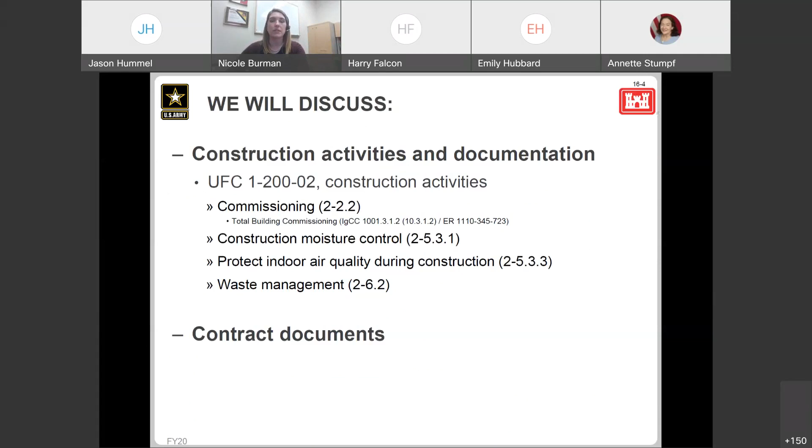We want to talk about specific strategies being implemented to achieve those goals, discuss what those expectations are, and those unique construction methods that maybe we should be talking about if somebody has something to bring to the table. We want to be a team and pull that information together in this meeting, identifying strategies and methods, bringing up lessons learned, identifying risks that the contractor sees when reviewing the documents. We want to bring all of that up right at the beginning.

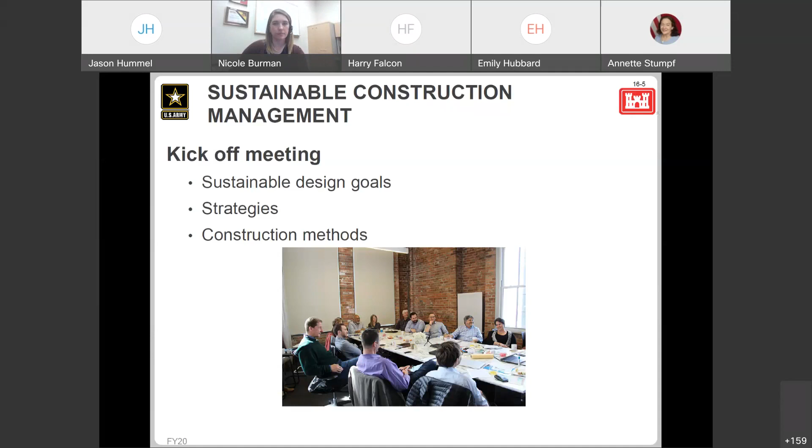One of those pre-construction submittals includes the sustainability action plan. This is, in my opinion, a very critical submittal. We want to make sure it is truly in that early stage of construction, because what this signifies to us is a solid understanding that our contractor is tracking and understanding the expectations for the high-performance sustainable building piece that our UFC addresses, in addition to, if that project requires third-party certification, we want to make sure they understand the similarities, the differences, and how they achieve those requirements written in the contract from start to finish.

So in this plan, we're looking—it used to be called the LEED implementation plan, so now it's called the sustainability action plan. Either way, it's showing us there's an action here. It's an early phase, wanting to make sure we're talking about that and working through the pieces that are going to be put into place to ensure everything in the contract gets accomplished. Eventually this plan itself falls into part of that sustainability notebook.

Sometimes that's a little confusing. Really, there's a lot of plans that fall into the sustainability e-notebook, and that notebook really is the final record of what was talked about, what was concluded, how things evolved, why things changed if they did, and then what was the achievement—did we get third-party certification and so forth?

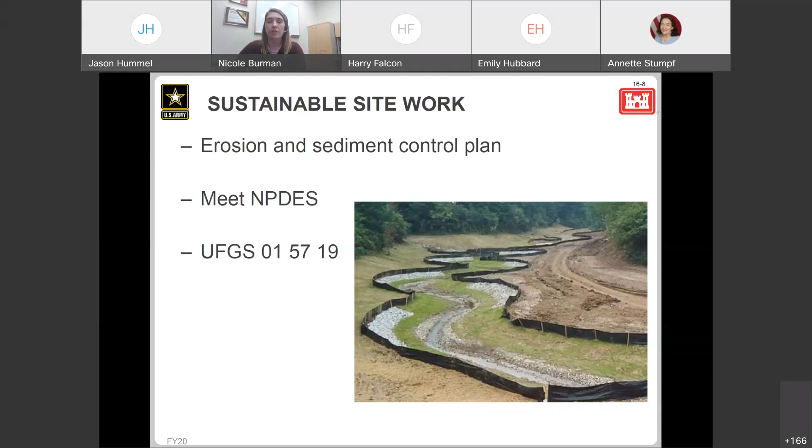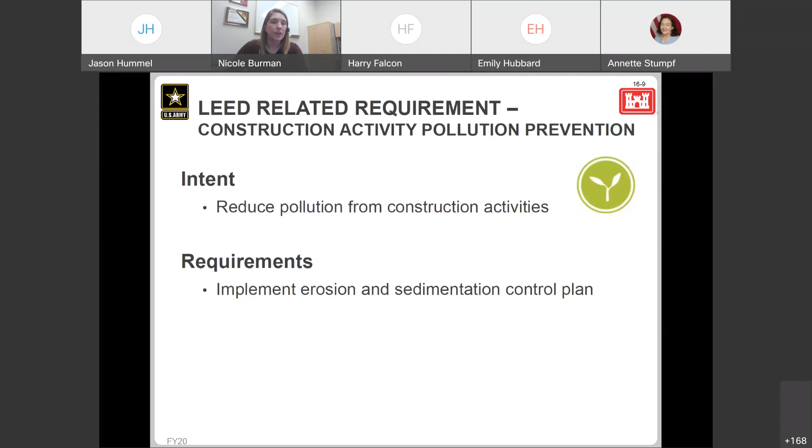Okay, so now we're going to dive into that commissioning element. This has several slides that talk about this. It will still be a high-level conversation, really, trying to make sure we hit all the points.

But if you need more detail, I would urge you all to review ER 1110-345-723. That really dives into commissioning, and if you need more information or would like to talk to people, we, part of the webinars, can help guide, but also your local district would have people who would be able to talk through commissioning a little deeper.

But when we're looking at this, this may be falling under construction here with our webinar today, but it's not just for construction, not just a construction activity. We're looking at that quality focus that enhances the delivery of the project. There's a lot of pieces that happen in construction, but the success of commissioning really starts at that early starting point in design.

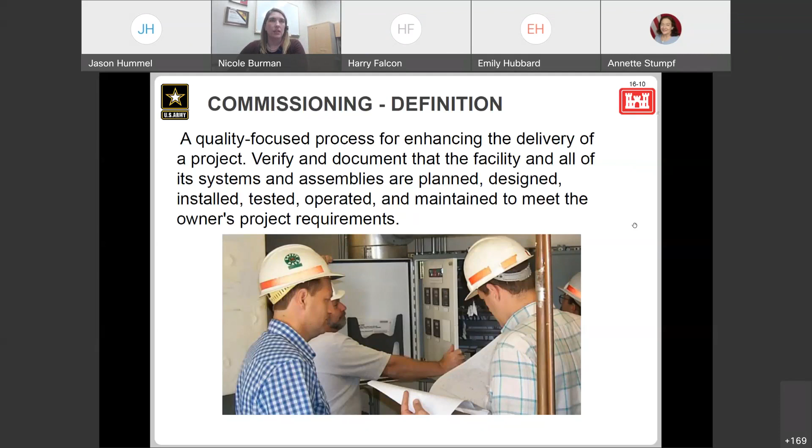So diving into more of those detailed pieces, the UFC in 2-2.2 identifies the commissioning requirements. It focuses on what used to be called ASHRAE 189.1. So now we're looking at the International Green Construction Code. This looks at incorporating commissioning into your projects.

Of course, it needs to be appropriately incorporated to the size and complexity of your building. The ER has some information on that too, but really looking at what is that specific piece that you're trying to build and what systems and components are in that feature, and then making sure that we're putting those commissioning pieces that make sense for that project to that magnitude.

We also want to look at these sections of the IGCC to see more of that in-depth. In the next couple slides, we'll actually see kind of a listing of what they identify in systems for commissioning itself. But all PDT needs to be involved in the commissioning process.

So the next item here, we have our UFGS. That's an 01 spec, so 01 91 00.15 10, Total Building Commissioning. That specification, a commissioning team can put together, the designer of record can put together, but we want to make sure that all of those parties are involved in understanding what we are working towards, to the extent of what kind of testing we're doing.

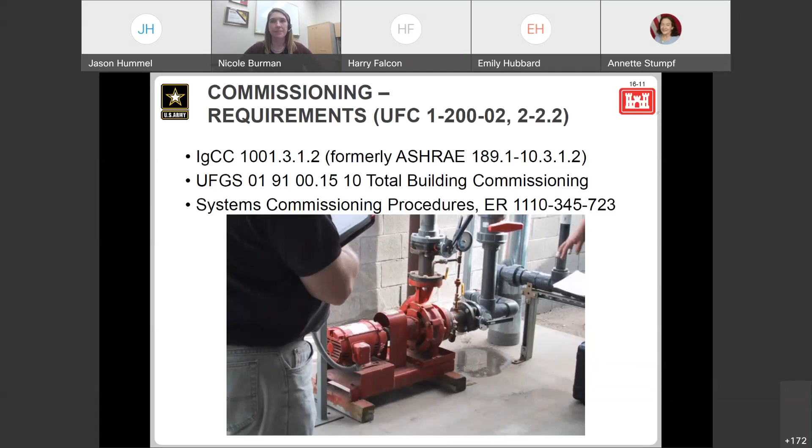Who are those specialists? When we're looking at CXG, that is the government commissioning specialist. So if we aren't doing the commissioning reviews ourselves, as in that main commissioning person who's certified to do commissioning in-house, then we're hiring an AE to do that. The CXG, the government specialist, is that hired AE. So that's who they are under this whole umbrella.

And then we could have commissioning team members—design team members who have that hat of commissioning—and then same with construction. We want to have construction involved very early to talk about all these commissioning pieces and that integration. So that would be that part of the team. And then, of course, we have the owner, the designer of record, the construction contractor who would eventually get on board here, and then operations and maintenance staff.

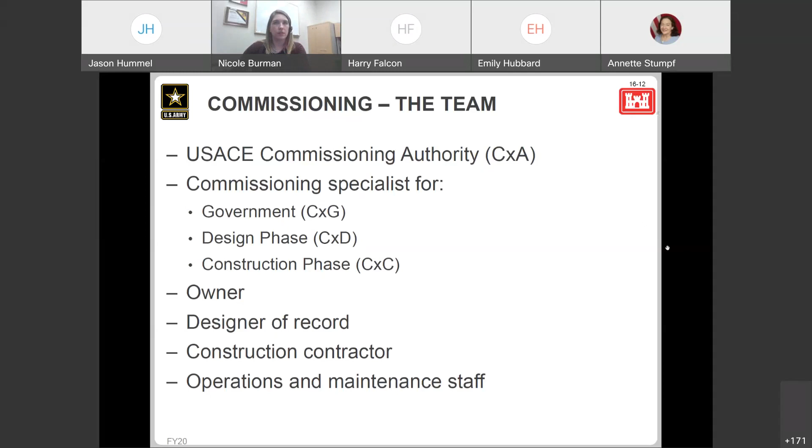But that does not mean the project can't identify additional systems. So this is where that early consideration needs to be had, and the team can sit down and talk through what systems should be incorporated, what you know as the designer of record, what you're putting in the project.

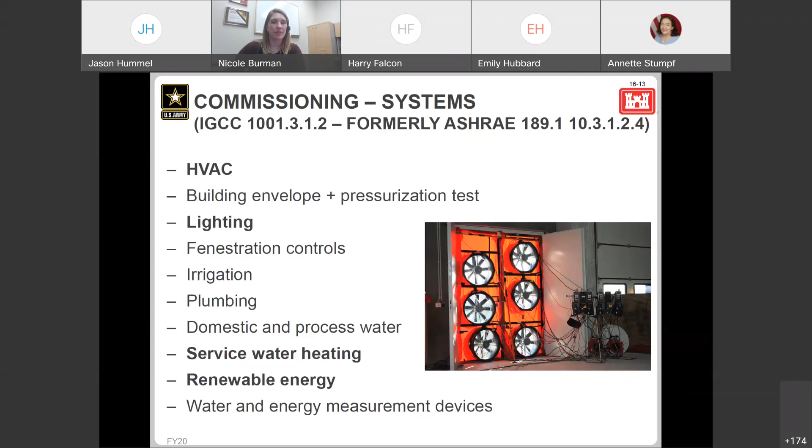Okay, so hopefully we'll have some time at the end too if we need to talk some more about this.

So commissioning activities—we are looking at a lot of items that are incorporated into those activities. These activities are identified in the IGCC. And so when we're looking at the owner's project requirements, a lot of times I get questions about, okay, we have another document we have to make.

So what we found over the years is that most districts or design teams are utilizing their PCRs, their charrette reports, or even the RFP as those owner project requirements, because we really want to mitigate some of that risk by having duplicated requirements, and we also have more efficiency if we apply some of these pieces together. But similar to identifying the government CXG as the commissioning authority for third party, we also want to make sure that's clearly written somewhere. I've actually seen that written in the 0191 spec to clearly state owner's project requirements are the same as the charrette report or the RFP. We want to make sure that's clear.

Then we also have that basis of design—that's the commissioning term for it. Sometimes we use that term ourselves, but we also use design analysis, so those are one and the same. That's really diving into how we took those owner project requirements and put that into the design—how did they evolve, why did certain things happen, what do we need to be cautious of. All of those pieces pull that into the evolution of design and then into construction.

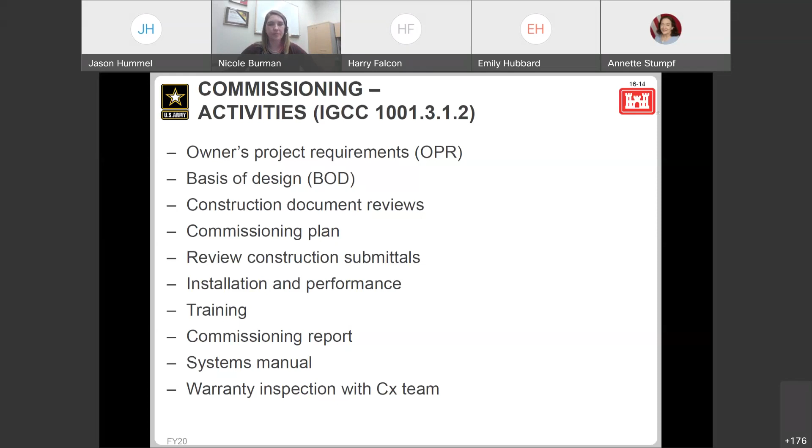Okay, so lessons learned in commissioning. We want to identify and designate those authorities early.

So when we're looking at schedules and projects, for an in-house project, potentially we've got that element where, hey, we don't have a commissioning or a set-aside commissioning team, or we don't have the workload to support a set-aside commissioning team. We're going to need to get somebody. So that's an AE action we're going to need to be thinking about right at the beginning. We want them on board, preferably before 35%, but no later than 50%, right?

We want to make sure that we get that integrated into the project itself, and we want to get those roles and responsibilities figured out. We want to understand what those commissioning reviews are looking like. That's another sticking point that really wants to make sure we work with our construction team to understand what those reviews are, both in design and then what those are physically for the submittals in construction.

And then adequate time, so this is another soapbox item for me, but we've got to make sure that we identify commissioning in our schedules, right? We need to have that and see it from the contractor detailed out in their construction schedules, because it's not just a red zone activity. It used to be that way or used to feel that way, but there's a lot of pieces of review and prep and testing. All of those pieces come at different phases of construction, especially when we're talking about the exterior of the building, looking at air tightness features and so forth. So we want to make sure that's in a schedule and people are tracking it and linked to things.

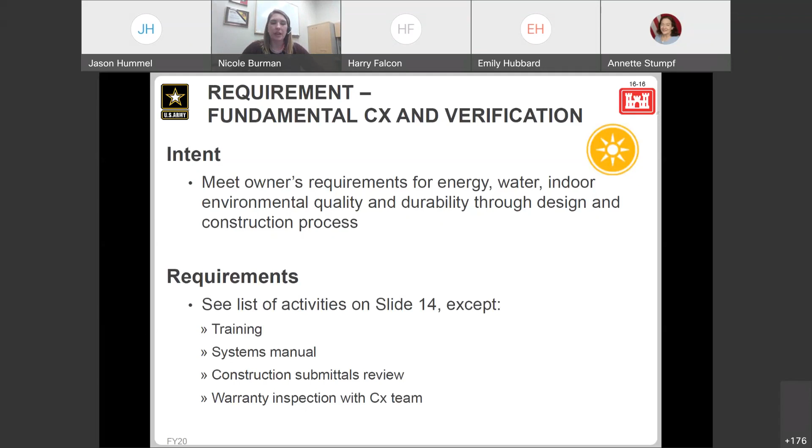Really, our ECBs and requirements already in the UFC should be meeting this requirement. Of course, as we mentioned before, you always need to pay attention to, if we're going after third-party certification, how removed that CxA or CxG, whoever's that LEED commissioning certified individual is, where should they be sitting? Making sure they're most likely not integrated with the design team would be what we'd want to be seeing.

And then the secondary one here, which is an opportunity, which we should be almost meeting naturally if we're following the ER, if not meeting it all the way for enhanced commissioning. So really adding that envelope element, that total building element into here, would meet or get us darn close to getting that enhanced commissioning.

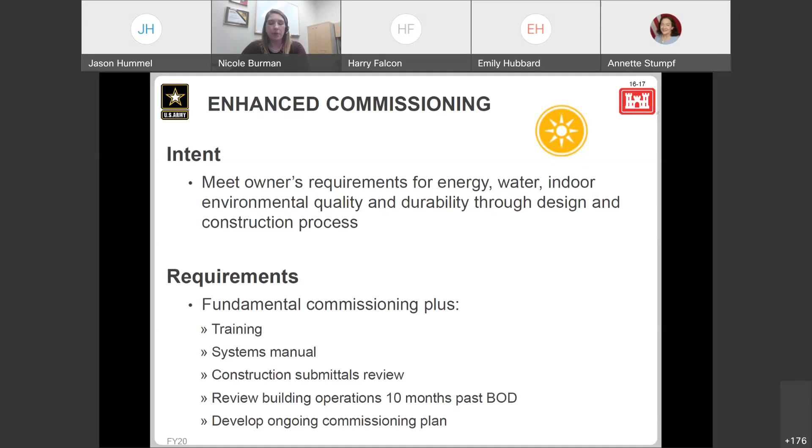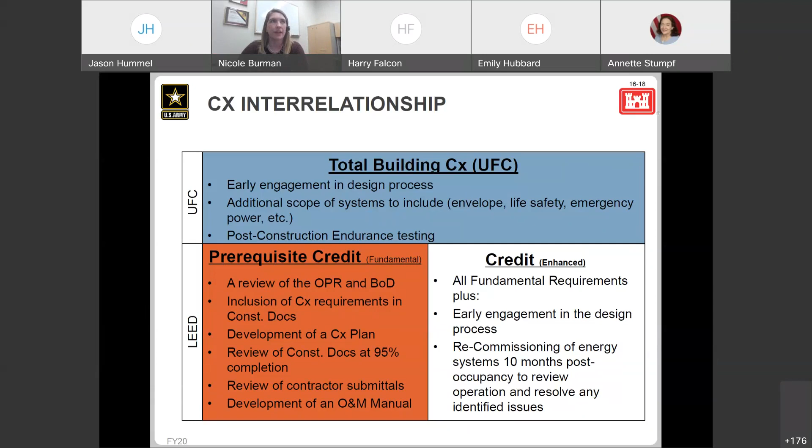So we're trying to control that moisture in the building or where we don't want it to be collecting, ensuring that we have that indoor environmental quality. And again, we're looking at that IGCC piece, calling out protection of materials from damage. So we do not want to install anything that has that biological growth or moisture, right? We're wanting to avoid growing mold in our buildings.

This, of course, seems like a no-brainer, but this is where we want to make sure we're including that in our conversations. It may seem natural to make sure that elements are covered up, buildings are dried in, and features are not getting damaged by moisture. But we also know things happen, but to ensure that those things get resolved or don't happen, we're talking about them in our preparatory meetings.

We're making sure that we're talking about this during our monthly sustainability meetings. We're making sure that materials aren't arriving too early to the site, questioning potentially why we're there, and if they are there, how are you going to confirm that we're going to protect them and keep them away from potential risk here.

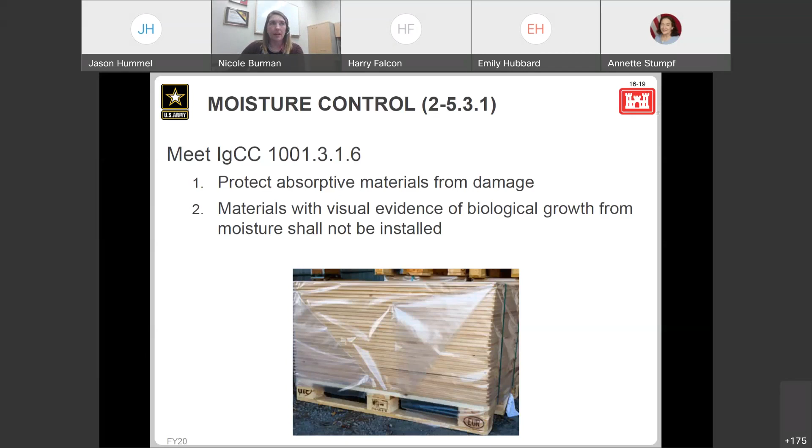Nope, my cursor, there we go. Okay.

So when we're looking at another item, it's protecting the air quality during construction. So here it's mainly focused on really those materials that could absorb or be damaged during construction. For that air quality piece, again, we have approaches and things we have to consider from the International Green Construction Code, and we're looking at that air conveyance material.

And then we are requiring all the correct filters, right? The design requires it. We ensure that those are installed correctly. The controls are in place when we're operating the HVAC system during building flush out, that we've got that figured out. And we're identifying, again, in our construction schedule, when that flush out is going to happen, making sure that's linked to something. So if we know things move because things happen, we know that's affecting that flush out piece, and thinking about what the ramifications really are, and if that's meeting our sustainability goals, or how we can adjust that and work together to find a good solution.

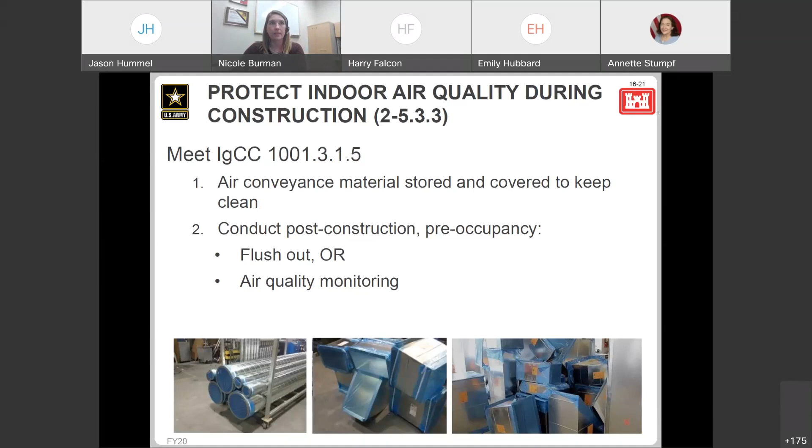So for third party, we have the plan, right? The air quality management plan. This would be incorporated into that e-notebook per our specifications, but this is required as a prerequisite for LEED specifically.

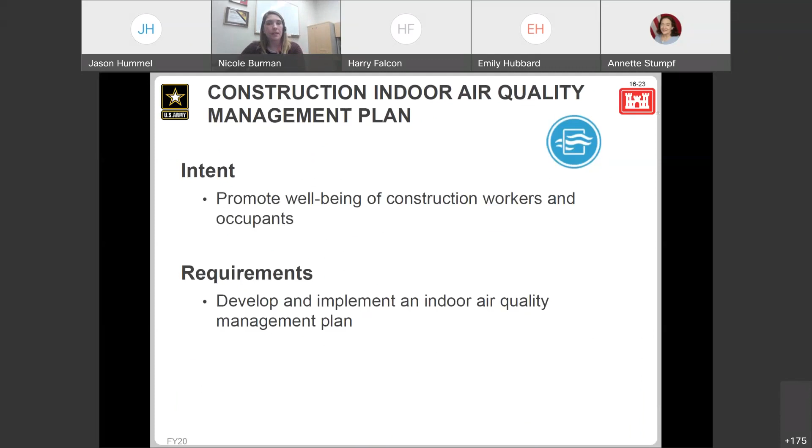And then we've got the assessment, so an opportunity for the team is to see if this is going to be a part of that project and a part of the scope for the contractor. And then, of course, tracking that. If we've identified that the contractors agreed that this is something they'll pursue at the beginning of construction, we want to make sure we track that and understand that's a credit that would be lost if we don't pursue it in the right manner. So it's important to know if we're pursuing that credit or not, but that's how that's integrated with our UFC.

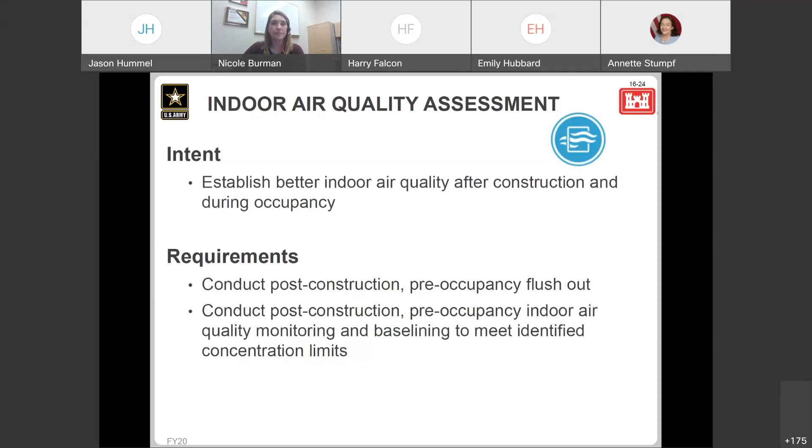Okay, waste and material management. This is probably not new to any of us, but when we're looking at the requirements, I'd note that the IGCC requirement actually requires a minimum of 50% waste diversion, but our UFC and other policies require 60%. That did increase, maybe 10 years ago I feel like it's been a while, but either way our standard spec has that written in there. It should be covered and taken care of for us, but we want to be aware that the 60% is required.

I will also note that we're looking at non-hazardous construction and demolition waste. This has come up before where we're like, hey, we got a lot of abatement, there's no way we can meet this, but that's not included. We're looking at that non-hazard waste.

This is also where we want to track all those calculations. Anything leaving that site, we need to be accounting for that. We need to see those haul records. Those need to be shown in a timely fashion in that e-notebook, which is supposed to be reviewed and looked at every month during the construction phase. And so all of these pieces would be integrated, being aware of what's moving on site, what's working through that, and then where that information is implemented into our record documents.

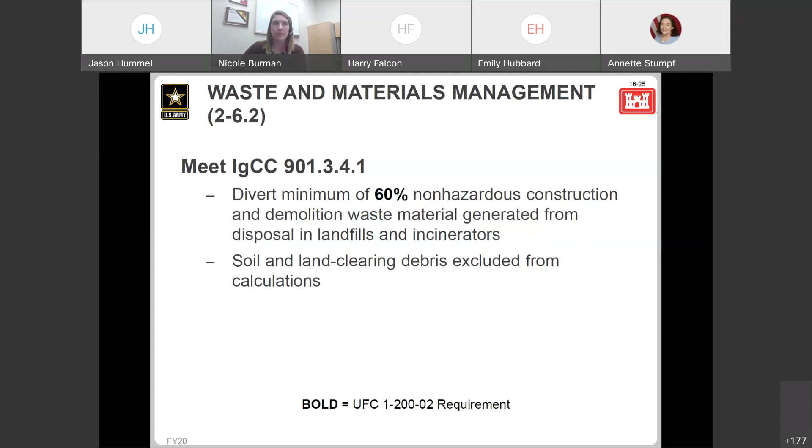So diverting, I probably covered most of the same stuff here, really looking for evidence of meeting that, talking about that sustainability goal, demonstrating compliance with the haul records, but also talking about those in your preparatories and the toolbox, making sure all subs and people involved are aware of this, and tracking that somebody else is also monitoring this. Somebody is keeping track of this, and that this has some importance to the project.

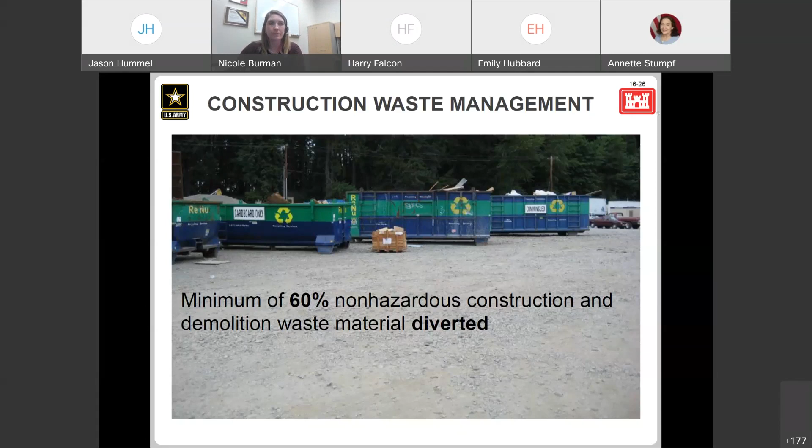All right, so we also identify in the 013329 spec the contractor's sustainability professional. This could be that LEED AP BD+C if we're doing version 4, right? They actually require that to be within the same LEED system that you're applying for certification. But if the project is obtaining a different third party verification of some sort, if you're Air Force and so forth, that could be the LEED AP or some other type of credential that you want to put in that specification.

So that's not accounted for specifically in a spec. If you're working with other agencies, you want to make sure you're identifying if that's appropriate to open that requirement up a little bit. But we still want that sustainability professional there. Those individuals, even if you're doing a guiding principle validation, if they have a LEED AP, they're going to have those principles and that awareness we need, that professionalism, incorporated into the process. I have seen projects that maybe don't have that person on board, and it's tough to work through that process, and there's a large learning curve, and maybe things aren't getting tracked because we don't have that professional on board. So it's important to ensure we're confirming they've got somebody who meets whatever standards we've written into that specification.

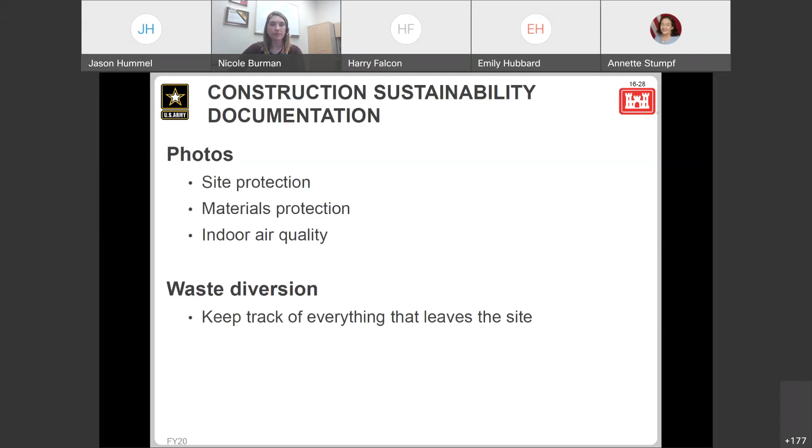Okay, so the big moment comes. We've got construction winding down. Things are potentially or soon to be closed out. We've got this third-party certification happening. A lot of things are in mind. Hopefully at this stage, when we're in the red zone, this isn't the first time we're talking about sustainability or any awareness of that third-party certification needing to be submitted.

We want to be reviewing with some more diligence that sustainability e-notebook in the red zone, because we want to make sure all this information is documented. I'll tell you we've had situations where contractors have had issues - their own business issues - having trouble closing contracts, or they go under or something. The only thing the government has to fall back on is what is documented in that notebook. So we want to see timely documentation so that if the worst happens - hopefully not, never fun - we have all of the information at our fingertips to continue the process to the best of our ability. So there is importance to have that documentation incorporated.

And then the third-party certification, that's at substantial completion. I'll say a lot of times I see contractors finish the job and then go to put the documents together and start to pull it in. That does not have to happen that way. Best practice really would be pulling that information together, having their sustainability person on board, incorporating that in, and submitting it as soon as we can. We want to make that proactive step in submitting that documentation for third party as soon as you can.

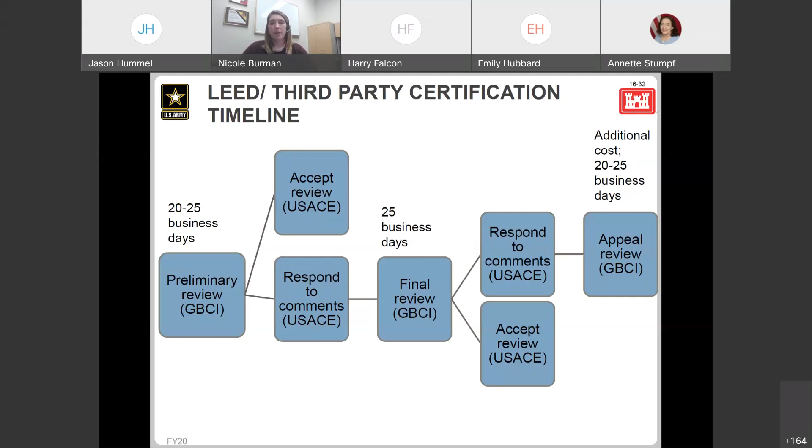So we're right on time, but if there's a question or two, I'm here to help answer.